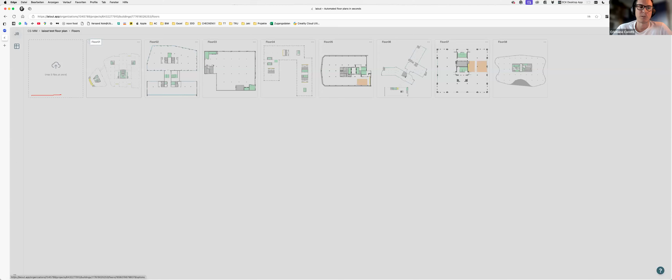Those are floor plans from different parts of the world, added on top if you want to test different scenarios, different shapes of buildings, different sizes. Those are here for you to test - they're all included. It's easier to learn and practice on different shapes, not just one. If you want to test different ones, it's all included.

Once you're here, for example, for the workshop we start with this one. This is a simple one, and it's always better because it's simpler to use. If you click on the 3 dots on the top right of each card, you see there are some settings - rename, favorites, setting.

If you click on setting, this is something you can do on any floor. If you have an occupancy you know is a maximum on a certain floor, you can put 150, 120, for example - the maximum value you want the algorithm to place, not the request from your client. But if you know that floor cannot stand more than 120 people for fire emergency or so on, you can type it. The algorithm will never place more than that - it's the ceiling for the algorithm. If you click submit, it will set this as your maximum occupancy.

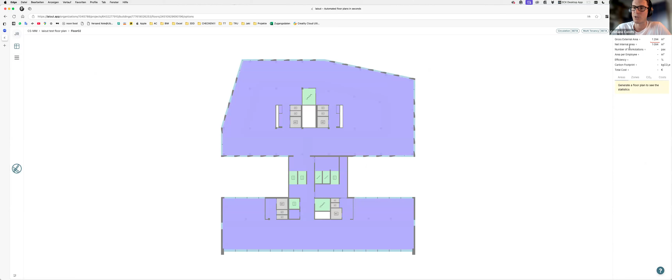So you will start to see the floor plan. On the top right, you get the gross external area - if you hover your mouse on that text, it shows the gross external area, the footprint of the building or the net area. You can visualize quickly how the areas are, and where you can physically walk. Right now, we didn't generate anything, so all these values are empty - it's an empty floor, no number of people, no efficiency, and so on.

If you go on the left side, there's the burger - what the tech people call burger are the 3 lines. If you click on the 3 lines on the left side, this will open the preferences. Those are the requirements the client will send to you - a brief, a program, different names in different languages, but you see here maximum occupancy is 120, which is what you set before.

At the beginning of the test, this number is the one that you put. So this company requested, for example, 120 people. You can type a value there.

Can I ask a question? Of course, any point in time. Sorry everyone, I forgot to say - if you have questions, feel free to ask. The gray area, the designated circulation space shown on the plan - is that something we have to put in, or something the program puts in?

Yes, that's a very good question, and the idea was to go there later, but I can do it right now. So in reality, this one is fundamental for the algorithm.

So you need to have a baseline, because the algorithm doesn't know otherwise where to enter rooms, for example. It has to have some, let's say, the spine of the building. And of course, you can change it.

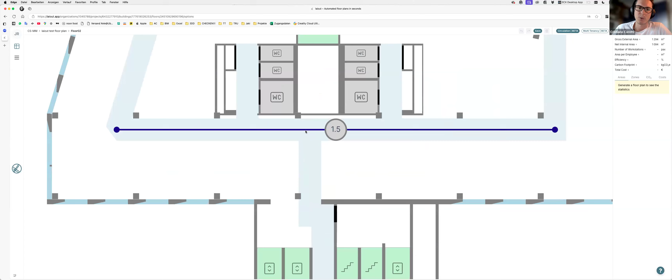But for example, if you click here on circulation, you see that now this one is activated. So you can physically, if you zoom in, you can see the circle.

So if you click inside the circle and you drag, you can change the dimension, the diameter of the corridor. So you have some corridors are 1.2 meters, some corridors are like 1.5. If you want, you can make a very big corridor and so on. As you see, the circle is the one that allows you to change the dimension.

But then you can drag and drop, drag and drop. You can drag it and move it. You can, of course, create new ones.

So for example, if you click on the white space, wherever the space is white, and click and hold, you can draw a new one. And you have this perpendicular, so you see the projections of the line. That helps you to understand where you can draw the line. What are the perpendiculars? Yes, exactly.

You're doing great. So you can change all the time. My suggestion is this one: you can have a starting point that is something you upload, but then of course you can change the corridor and test different scenarios.

Does it make sense? Double click to delete. One additional question: if I want to position the corridor, say 0.5 meters from the facade?

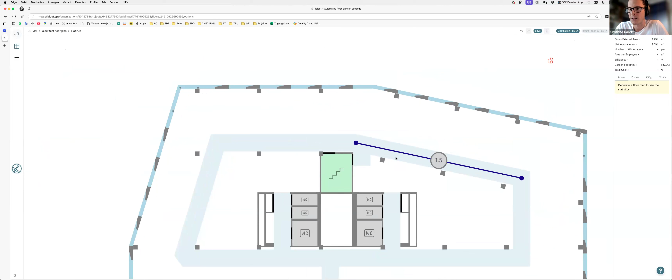It's a good question. Right now, this is something that usually you upload. So if you upload the corridor in the file, that stays there. Usually we upload a file for customers where the position is always like 5-6 meters, so you need to also include the space. But usually, if you upload a file with that, it will be placed in the position where you leave it.

And then, of course, you can change it. I upload the file with the information of the core, of the facade, and probably a defined position of the corridor, right? And that's it, the rest is empty, because then we have the details to handle, okay.

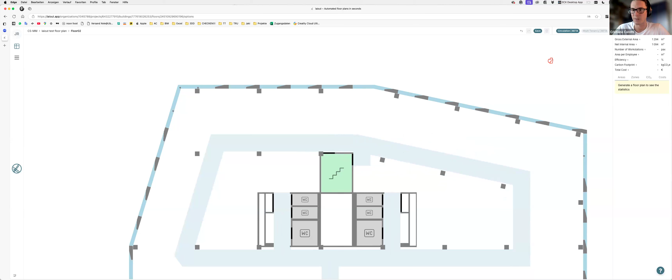Thank you. Exactly, no problem, Tiziana. It's a pleasure. Please ask questions, I'm here for this reason.

One additional question, please. Actually, the starting point of each project will obviously be to import the file and to define those different areas — where is the core, where is the facade. Is that something you're going to show us as well? Because it would be very helpful to start with importing the plan and then continue with doing the fit out.

Yeah, so what I can share with you, after this call, I will send you both this recording, but also I can send you a link to the guidelines. The guidelines will show you existing before and after files. We use 6 or 8 layers in total, and those are pretty much the basic lines to help the upload. So we have customers that use the layout and just use this system for uploading the files.

But we also help companies — for example, some companies we upload the files for, we do the QA of the files for you. We just receive, for example, some areas — we want the corridors to be in a certain position, we want some walls to be preserved. So that is an example of how we usually work. I will share with you later this link so you can all see what the guidelines are.

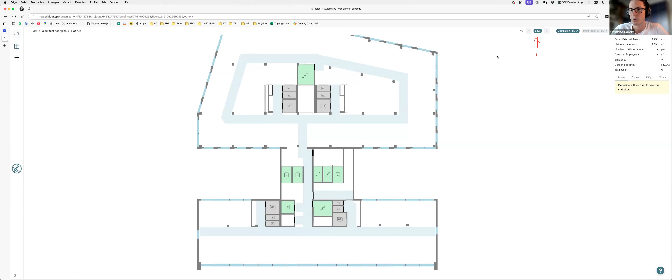And Jacqueline, if this is the corridor that you want, you can decide to save it, or you can just generate this one. If you save, it will be stored, so you will see it later on the app.

Now if you click on preferences, you can type the number of people - how many people do you have on your floor, or what is the request from your customer? Of course, if the customer asks for 150 people and the floor can have a maximum of 120, it will show an error. That's why you need to know a bit about the building beforehand.

Then by default, they will all go in open spaces. But if you click on closed offices, this tab will open a submenu. Quick question - it says number of workstations because you just said how many people. That might be a different thing.

Yes, normally you can have a lot more because, for example, if you consider meeting rooms, you could have 500 meeting rooms and people could sit there eventually. So the base is workstations, but I can show you that you can edit things. Usually we work with metrics based on workstations, but the number of people you can also check with one click - you can see how many seats you have in total on the entire floor.

So once you're here, if you hover your mouse over plus, you can see that you can create small, medium, large, extra large offices. The last one, a star, is for custom - if you want a specific number with a specific ratio that isn't allowed by default. Small is for 1 to 2 people, medium 3 to 4, large 5 to 10, etc.

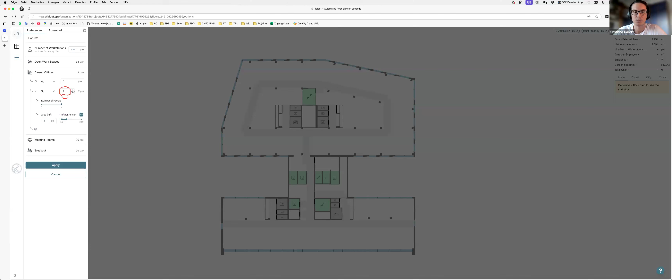Here you define how many people, how many rooms of that type you want - you can add or reduce. This isn't a big office, so of course it won't have a million people, but it's just to give you an idea.

Same thing, you can add more typologies on the plus. For example, a small office for 2 people, small office for 1 person, small office for 1 person bigger - you can create all the combinations you want. The AU option is for cases where customers want to quickly understand how many people they can fit, like needing 20 people in closed offices.

The algorithm will place 20 people with different combinations, but it's more automated - it's not following the same strict criteria as when you add manually on the plus. So you have different ways to approach this. AU is more generic, so if you want to be generic, automated is the way to go. If you go specific, that's a different type of approach, but you can choose the same process.

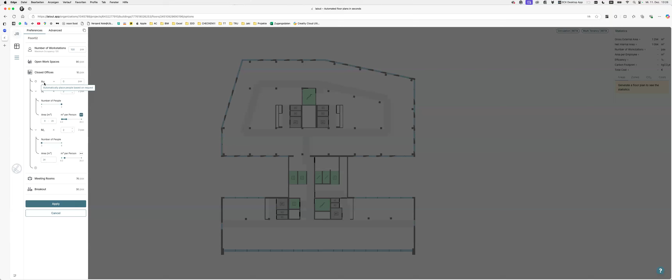Can we just import it and work with it? At the moment, we don't have the import function, but what I want to say is you can create here and replicate what you get, for example, on an Excel file.

With this button, for example, you're testing 2 buildings, you can copy. On the top right, you have the copy button. You can copy the settings, so you do them once and test, for example, 3 buildings. That's another case - you can replicate the same settings you put once into multiple buildings.

We have some clients testing 3 buildings for the same company, and it's always the same request. So instead of doing it 3 times, you do it once, then copy it into 3 different floors and test on 3 different floors.

Okay, thank you. So next year we are going to work on this upload, but it's something we have to postpone. We had quite a few things to deploy by the end of the year, so we're a bit squeezed, but we're getting quite a lot of things that are quite cool.

Then if you click on meeting rooms, it will open up here. You see there are other typologies. It's the same process that you do for closed offices - it works for meeting rooms and for breakout spaces.

If you want to remove something, like if extra large isn't necessary for the space, you hover on extra large and it will show a minus sign. You click there and it removes it. So you can very quickly add or remove.

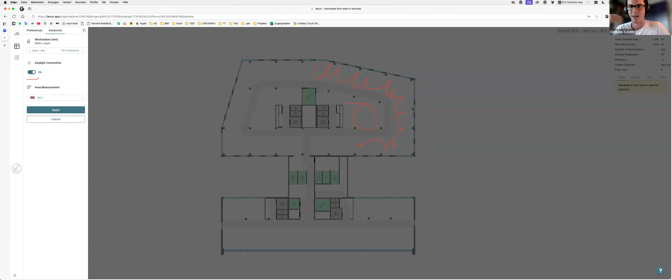Then you see daylight constraints are on. So you know that workstations and work areas will only be placed on the area close to windows - after 5 meters, roughly 5 to 6 meters is the range, they will not be placed in that area unless you switch it off. For example, when we work in the UK, since the UK doesn't have those rules, you can switch it off and it goes all the way across the building.

This is also a safety setting - even if you make a mistake later and select an area you want to change, it will show as white, as empty, to remind you that you cannot place workstations there if daylight constraints are on.

Then area measurements is for the areas that you see here. This building is in the UK, so if you switch to GIF it will measure the areas in a different way. Just one question.

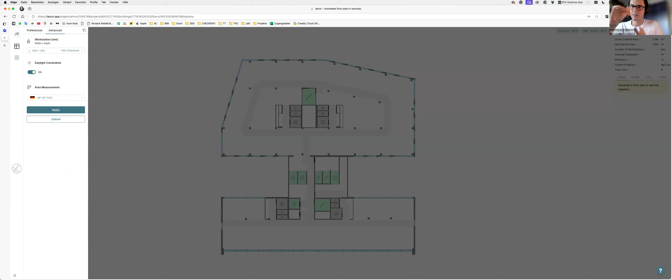The workstations are going to be placed close to the windows. A meeting room can be outside or in the middle, both are fine. There's a difference between has to be and can be - a meeting room can be next to a window but doesn't have to be, since it can also be where there's no light. But when you switch on the light constraint, you have to have work areas, closed and open space, next to windows. So one thing is that you can, and then you have to - that's where the difference is.

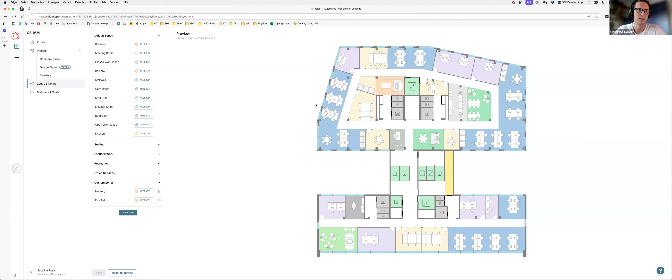I take notes of these things. If you click on the X, and then just click on the layout logo here - this one is, I think, 2 seconds or something - you get the first options. And if you click again, every time you click, you get another set of 3.

The idea of the initial step is to give you different combinations. You can click as many times as you want, and every time you click, you get another set of 3. The reason we don't create 500 options at a time is because having to look through 500 options takes a lot of time.

The idea is this: if you take your mouse, hover without clicking, and start to move on the right side, all the data here is updated. You see that all the numbers are changing, because we allow the algorithm to be flexible and start to move things around. If you move one room from one space to another, you can quickly change the space. You can see the number of workstations, the area per employee, the efficiency of the floor, the carbon footprint, and the cost - this cost and information are all based on the data in each floor.

These icons, the little icons in the corners, guide you through the options. The green ones are lowest cost, lowest carbon footprint. The blue one is the highest, the most spacious one - this one has more space, this one is more dense. Those are not the final step - they're just the intermediate step where you can start from one value compared to another, depending on the targets that you have.

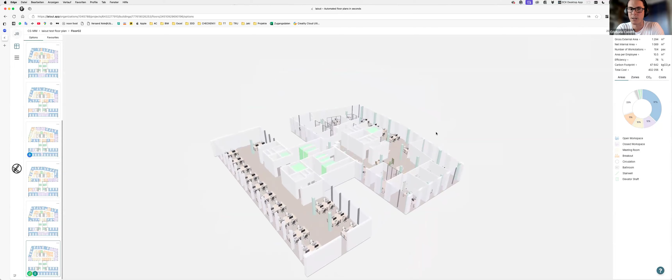So with one click you can create a 3D view from something that didn't exist a few seconds ago. You can spin around, and if you go closer and move your mouse - where is the corridor? You can double click. Exactly, you did very well - you can see you can move around, use the arrows and move around the office.

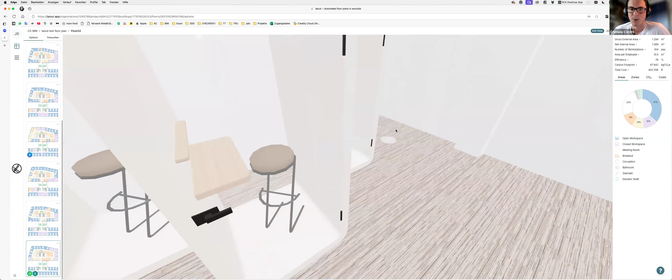This one is like a preview - in a sense, it's not your final design. Maybe you don't like this kind of carpet or these chairs, but it's mostly to get the volumetry, the volumes of the space. You see where your cursor is, and it works exactly like Google Maps - even when you're inside, you can double click on a corridor and it will take you there. Yes, if you double click there, you can move around and see the corridors and spaces.

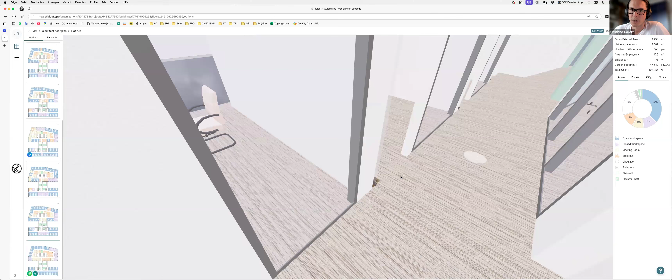So then if you click back on 2D, you go back to the 2D view, and here is where you can start to edit things. For example, if you zoom, that will bring you back to the set, to all the options. You can see all the options here on this side, so you can very quickly see it.

Let's say this area in the bottom is the one I like the least, and you want to change something. If you zoom in on the bottom part, let's say you want to change this area and organize it. If you click on the zone, you will see these settings. If you click on the info button, now you select the two areas. Just click wherever is white to deselect, and now you can select.

Then the info button here will tell you information about the total number of seats, so it calculates the seats everywhere. You can even select the entire floor and see how many seats in total you have, not only the workstations, but the areas and the ratios.

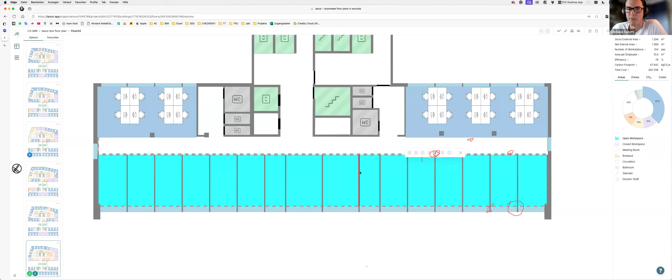This button here, the fourth one, lets you split. Whenever you want to split a space, it will recognize the elements of the building - in this case it will recognize the frames of the windows. So if you click there, or wherever you prefer, it will split the space.

Now you can, for example, click outside, then click back on this one, and then split - please split here, for example. You can click outside, click on this one, and then this button here allows you to change it.

You can change it to anything else you want - so open workspace, you want to change it to, for example, breakout - and it will replace the area with something else. If you change it to meeting room, remember before I was telling you about the quantities of cost, CO2, and so on - if you change it to meeting room, it will just allocate people there.

Then if you click outside and zoom in, if you click on the furniture now, you will see that you have these new buttons here. This one deletes, this one on the right copies, and the one in the center, if you click and drag, it will increase or decrease the amount of desks.

If you drag it up, hold and drag, it will add. If you go down in the same direction, it will remove. Again, the idea is not that you will need absolutely to use this table - you can use any other shape, but this one is to quantify the space, so how many you can place.

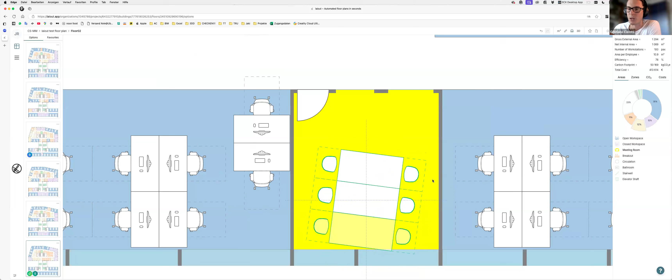And of course you can rotate it. It recognizes obstacles - for example, if you go against the wall, it will recognize that there is a wall. You can click and hold to move things around, and if you release, it will recognize that there is a table in the middle of a wall and it will remove it.

This works for everything, and every time you want, you can undo. On the top button you have undo, or you can just redo what you were doing before - you can change or refresh the space, and make it in any other topology if you want.

Custom is whenever you have a space that is not on this list. So if there is a client who wants a server room, we don't design server rooms - laiout wasn't born for that. But you can type anything you want, choose an icon, and the area will be replaced with that icon. This means that if you have a server, you can just choose an icon.

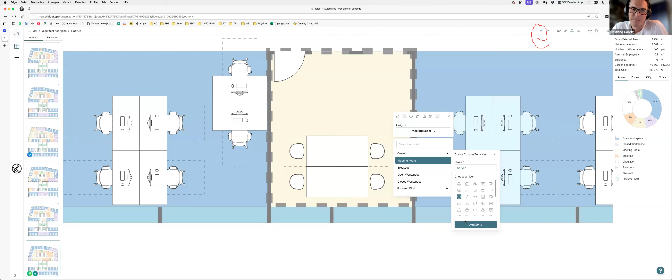Anything that you like, really. So the area will be replaced, and if you go here, you see that there is now a server room over here.

So every change that you make in the app has a direct impact on the full design. This is quite important to notice, because every time you do a change - for example, you see now you have 100 people in total.

If you click on this desk and click and drag it outside, drop it outside - now 98, the area per employee changed, all the statistics and numbers change. So every time you do a change, it will have a live impact - you can live change and correct what you're doing.

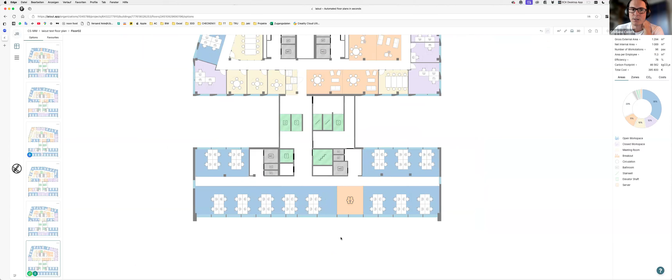And of course you can change everything - you can add the kitchen, for example, you can add other topologies of elements. You can merge, for example, let's say you want to change this one to a reception. You can click, click outside, change it, and you can do like office services.

And then you have like a reception. Question: if I add a meeting room, for example, down at the working place where it is, will it remove the meeting room somewhere else?

No, because otherwise think about it, you move it, you add it in a place and then it will remove it from the other. What if you wanted to keep it up there?

So in reality, you can see here, if you go in zones, you see the breakdown. So you can quantify and check, for example, the quantity of meeting space that you have.

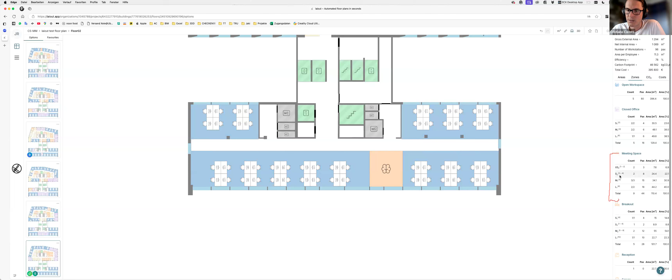Okay, come back. It actually overrules what you put in at the beginning, if you start working. Yeah, I mean, if you think about it, it's like design, right? Usually when you need to do it, that was the question. Just to make sure, no, of course, I'm trying to help.

So, of course, it doesn't always keep what you want, but even in that case, let's say you can select, for example, if you select this area, you can do just a rectangular selection.

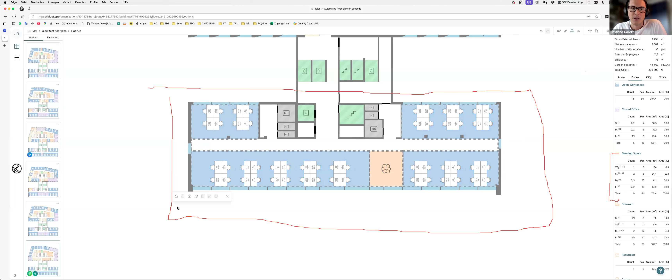Yeah, if you select everything, you can use this button here, the lock. This will lock the selection. So let's say this part is your favorite part of the office, and you want to keep it while you change everything else.

You just click on regenerate, the generate button on the left, and this will give you other combinations. Keep modification, you can say yes or no.

It doesn't matter, because it will just create 3 new options where the part you froze stays the same. Of course, in a small office, if you freeze everything apart from one room, there will not be a lot of options generated, but it depends on the different combinations.

And of course, you can use both this generation in which you freeze parts, and doing it manually. Does it help so far?

Yeah, thanks. Okay, one more question. We often have projects which are bigger than 1 floor, so we have to prove a building. Now we're talking about 1 floor. How does it work with more floors? You were talking about 900 people you were checking last days, you said. How does it work? Was that 1 floor only?

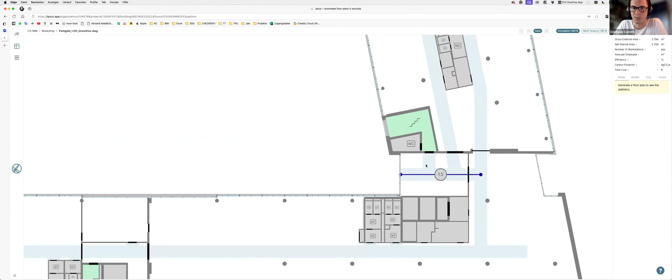If you make a mistake, the undo button is always there to help. So the way it works is the same. I didn't set the maximum occupancy in this case, but you can go back and set it at the beginning. You can adjust, even go back one step, and in the settings you can set what the maximum is. Of course, we don't think there are 10,000 people in that space, but usually we put a big number so it's evident there is no limit.

So what do you recommend, should we always use a big number, or is it best to set a specific one? Honestly, it depends. We put a big number as default just because we don't know if people want to do max capacity, flooding the space with people and then removing, or if they want a small amount to be sure. It depends on the company.

If you go towards Asia, it's more about max capacity, how many people you can fit, regardless of how many people can actually live in the space. Europe, apart from the UK, is a bit different, and it's about smaller numbers. But I have no idea, Milos, how many people were in the project?

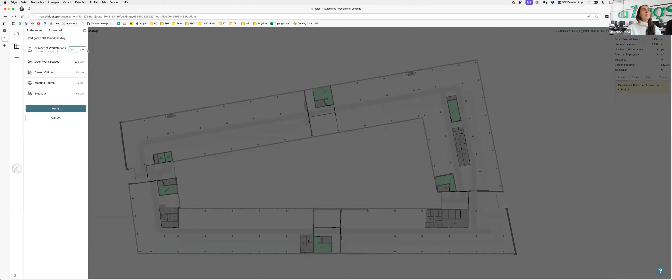But if I put 250, then it's not going to go up, or is this a limit? Is it the limit? The occupancy is, for example, for a fire emergency—you cannot place more than a certain amount of people due to how many can actually escape the building. So it depends, those are building regulations usually, and it depends on the building most of the time.

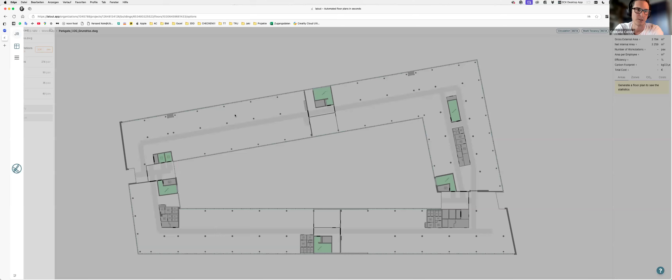So we don't know what the regulations are for each single building in the world. That's why this isn't even about country regulation, it's about the building itself. If a building is made of wood compared to concrete or steel, it has different ratios it can hold, so you can change it—you have the settings to control it yourself.

One question: did you mark the stairs and these areas, or when? Yes. So in reality, when we uploaded the floor, we see the CAD file, and staircases are quite easy to recognize, so we mark them as a stairwell, and that's why you see them marked in this way.

Whenever we select an area, we mark it, we don't put every single step because at this level you don't need to know how many steps there are on the stair, just the area. One thing we're working on is telling you how far you are from emergency exits. In case of fire, different countries have different regulations—with a sprinkler system, you might have 40 or 50 meters, depending on where you are in the world. So it measures automatically from a staircase, meaning you know from the door of the stairwell you need to be within that distance, and it will color accordingly.

We are actually experimenting with this now, so it's quite fun to see, but it's still something that will come live next year. And this import, are we going to do this now, or are you going to send us? Is it something complicated?

I'm sending it. It depends, like I do it every day, so for me it's not very difficult. Some companies do it daily, some others simply want our help. It's not really a big deal for us.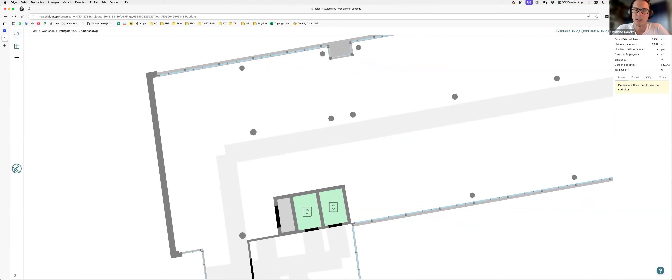And for example, even if you zoom out for one second, Kajetan, please, this area could be very wide or very small. So this is a kind of courtyard, but sometimes you have light wells that are very narrow, and the algorithm doesn't know if that one has light or not. So we have a layer called the light well, meaning light enters in that court.

So we have buildings with big courts with a skylight. In that case, you can place work areas that face inside the court, and then there's a layer called the light well that simply says there is light inside. Otherwise, the algorithm recognizes only the outside of the building as bringing light in. This is very technical, but it's pretty much how the algorithm works in the background.

Makes sense. But what I sent you was a DWG. Yes, we work with that, the only thing is instead of DWG, we import DXF. You pretty much just save it from DWG. It's because Autodesk is not very friendly with startups, so you need to use open source formats. Okay, so when I have a DWG, can I set my DWG already with the parameters?

So when I import, is it going to recognize what's a window, walls and whatever, or do we put the file there and then have to really define what's going on, or no? Of course, if the file is saved in the DXF format and it follows the guidelines, you upload the file, it takes 3-4 seconds and it's online.

Can I have one quick question, Cristiano? Of course, please. Is there a possibility, because I think the question was how to do the grid ourselves, so it's generated within grid. Can we cheat it a little bit? Do I understand correctly that if we are making the material of the facade or layer of the facade in the DXF file, the glass one means it will not connect the wall, and the wall one means that it connects, or it's a mullion? So actually we can make the mullions that we do not want to connect to the walls like the glass ones, and make it only grid with the wall material on the facade, and that way we have a possibility of controlling our grid. Is it possible to make this?

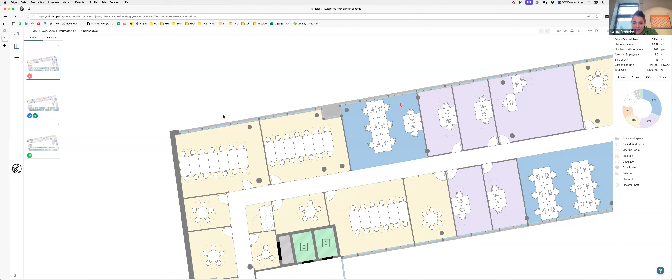Does it make sense? Does it answer your question, Tiziana? What do you think? Yes, but for example, Cristiano, if you take a look at this generated floor plan, if you zoom in please Kajetan, in this violet two double rooms on the right side, there is a wall positioned. I'm sure this point is not possible because we have the two big pillars, and then in the middle we have one, and this is the Pfosten, which comes after 1.25 or 1.23 meters, and the one where the wall touches the facade.

I think this is only a kind of Öffnungsflügel. I'm sorry, Cristiano, it's a window. It's a window. Oh yes, window, it's a window. Oh God. Öffnungsflügel. Oh my God, it's a fucking window. No, but this is how I talk at home. Don't worry. No, but when you're here, like, Achtung, Ada, eine Absturzsicherung. Sorry, okay.

It will recognize those alignments. So in reality, in this case, we had the mullions looking like structural elements. Can I delete a wall?

You can actually, if you click outside and select these two, you can merge them together. So you don't delete, but you merge it, because it's like you simply assign it to another room. So if you click on two, you have this. You click also on the other one on the right.

Now you need to select these two. There's a merge button here. That's also good. It's like in science, you can transform something, but you cannot destroy it. There is always this wall, you can assign it to one space or another one. And of course, you can just organize it in a different way.

I understood better what you meant. Yes, you can. It's mostly about, in this case, the building had a lot of these small elements, and we simply mark them as a grid. It could also be used as a grid in some cases, but we don't know every building. So it is not a difficult thing to change.

My furniture is glued to the other ones here. How do I separate? Because you selected two, you just need to select one.

Of course, you can if you click. User error. So if you click twice, you go from the group to the single workstation. And for example, if you click here on this one, you can rotate it, drag it down.

Click, drag, click and hold. Don't worry, it's the first time it happens. If you click and hold that line and drag it down. Which line? There's a circle. Click there, that icon, yes. Click and hold and drag it down. Yes, it will mirror.

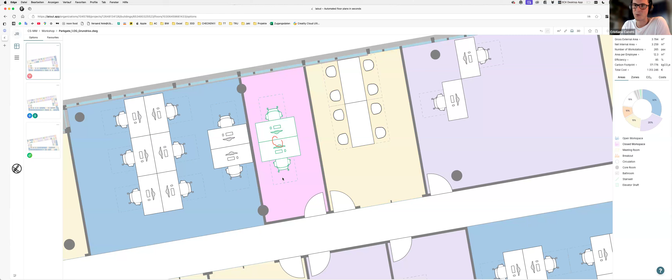Every time it's the first time, it's normal to have this, but you can adjust the spaces very quickly. In this case, for example, recognize there is an obstacle here. You can split this one into two, and it will refresh.

Can I move elements with numeric input? For example, 1 meter from the wall or 2 meters from the wall? No, that is not possible. It's a good question, we could add it in the future, but it's more like a feature for... actually, it's the first time I've been asked this. But yeah, it is something we could work on.

Usually the difficult part is that I think it's more related to BIM that you get this kind of question, because when you move these objects, you always need to define the direction where you're moving it, and it's a bit complicated to do. Yes, but maybe this is the limit of the program, which is absolutely fine, because there should be a limit.

Otherwise, you don't need architects anymore, so we have to work. Yeah, this is what I said before. After making the fit out with this one, we have to do the proof, then we have to work in detail.

We have a customer in the US actually. That's quite funny, they do a lot of ping pong tables in their offices. They have them spread around a lot. So it's actually the type of office where I would like to work.

You can change topologies. For example, there is a T-point, and if you have a kitchen, there is an area where you can put a kitchen. Let's say you can put a kitchen here. You can change it, yeah, you can do it there.

If you go to Office Services, here, you mean? Yeah, it's whatever you prefer. You can just change, and you go to Office Services, and then you have T-point, and this one will give you like a kitchen. Of course, you can place it against the wall, because it depends. You can have also a standing kitchen, but you can pretty much organize it and place it. Usually, where you have a core space, you can place it, and you can rotate it.

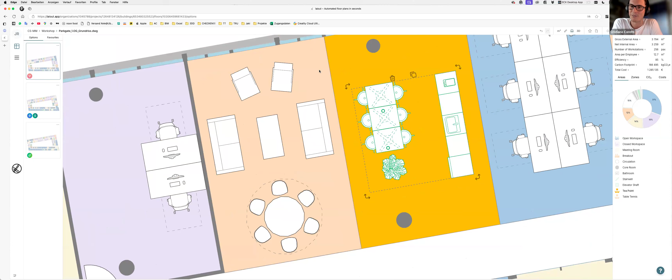Actually, you're quite lucky, because next week we're going to add quite a few things. One of them is you can select a single object, so you can select chairs, or a plant, and move it. We deploy this feature next Monday or Tuesday. For a lot of people, it's quite fun, so they can create entire new sets of topologies. Very cool, I like it.

And of course, you can save here. This is important, so whenever you create options, you can click on the star and add it to your favorites. You can call it whatever you want.

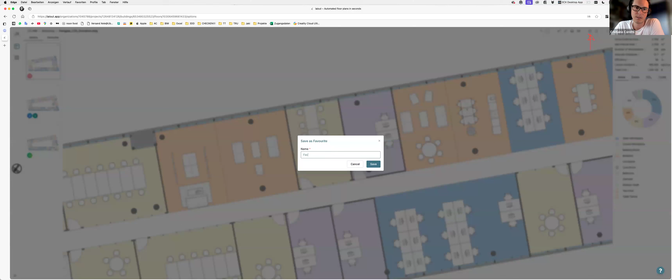And this will be renamed. Of course, your file will have a name, so it will be stored. This file is a bit bigger, but it will be here. And then if you go into favorites, on the top, you will see the option that you saved.

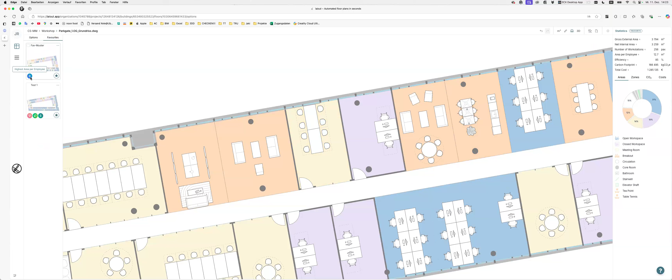I have another question concerning the kitchens. Is it possible to let the program know where to place kitchens according to where I can have water? Because yeah, it looks quite nice, a kitchen in the middle of the room, but it's not that realistic. So no, of course the idea is you know yourself where you can, because the algorithm doesn't know where the pipes for water are.

So in reality, it's important to give you control. You are the one using the app, so you know where you can place it. But based on that, you need to know, of course, where there is water. It's beautiful, the kitchen, wherever you want, but of course, I know myself. It's usually more to prevent issues. We give you the option to use it, but we don't always know where this can happen.

I have one more question. I tried saving with the star as a favorite, but when you go out again, it's deleted. How is it actually possible to save one of those test fits, so you can find it again later?

I think this one was yours, test one. Yes, okay, sorry, it's always saved. I panicked for a second. What do you mean it got deleted? Sorry, I got worried for a second.

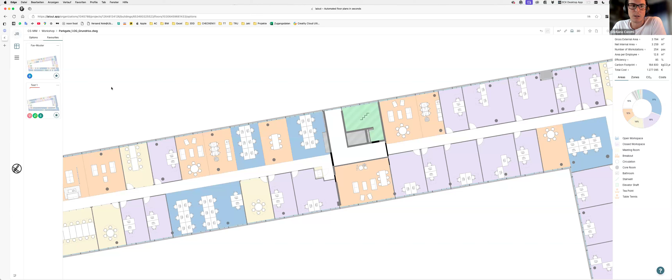Let's start over. Jacqueline, can you click on workshop? Can I save the changes I made in a favorite? Yes, if you click on save, since you saved before but made changes, you can override, or do save as, like any file in Word or anything else. So you can save and it will replace the one you did before, or you create a new option like test fit one, test fit one version two, or for example more meeting rooms or less meeting rooms, whatever you want.

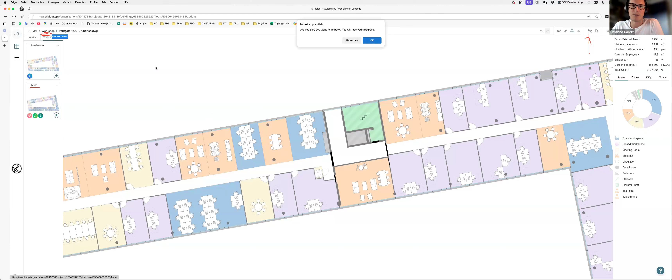If you click on workshop, we start from the empty floor. In case you want to review your favorites, you can go into the three dots and see favorites, so you don't need to enter inside the floor. You can just click there and visualize all the options your team saved. So everyone in your team can work on all the options. Think about three people in your company working on one floor plan - all of you can save the options and review each other's work.

Okay, so can I work like she's working on this one? Can I work in parallel? You can, but not at the same time, so you will not see each other's mouse in that sense. But for example you can open this file, make changes, and then save as.

So in reality, the option will be opened and you can edit it. For example, let's say someone did one design, then someone else joins and says, I think Jacqueline did a great design, I just don't like this part - or maybe you are not in the office and someone else has to make changes. They can do it on the spot, make changes, and save it as a variant, for example Cristiano's variant. So you can literally change quite a bit of the design.

Now, once you're here, if you click here, those are the export formats. If you click there, you can export the CSV. CSV is the Excel - everything you see on the statistics, every single page: the areas, zones, the carbon footprint calculation, the cost. If you click on export CSV, you'll be prompted with what you want to export - the percentages, the areas - all of it as an Excel file. It's simple, you can choose what you want to keep, save, or adjust. It's just a very basic CSV.

You can just open it and visualize it simply. I never actually tried it on Mac, but yes, it's a CSV file, so it opens normally on anything. There's a table, a spreadsheet with the breakdown of every single area, so you have data based on the design you made. You can track the areas, the percentages of occupancy of that floor. So you can have floor plan number one, download the CSV, and you have the floor plan with all the data connected to it - you can keep it as a data comparison.

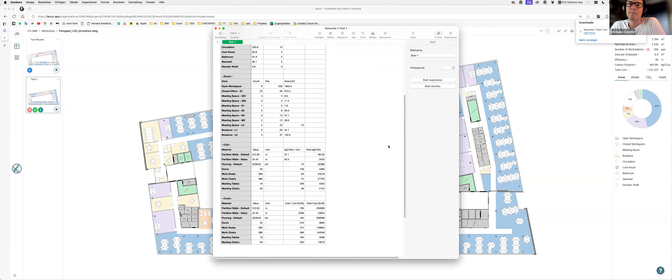Then if you click on the same export button as before, you can download the CAD file. The DXF is the CAD file, which will show all the blocks, everything you see here - you'll be able to open it as a CAD file. Every block is an instance, meaning if you want to replace a table or a chair, changing one will change the tables and chairs everywhere in the furniture, in the floor plan. So if you have a different type of chair you want to use, it's one click, one change, and it replaces everything. And yeah, this is another one.

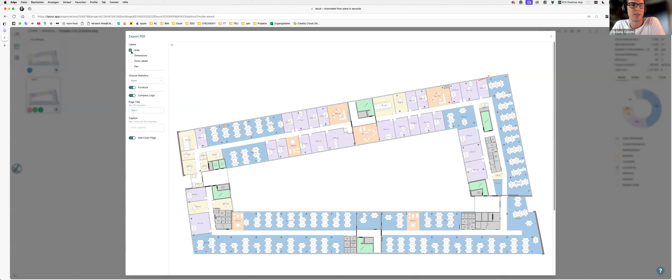And the last one is the PDF. You can create PDF presentations. Someone removed the company logo, but you can bring it back. If you have a company logo, it will appear here. If you upload a company logo in your profile, as I showed you before, it will show, but I think it has been removed and I cannot see it now. Anyway, we can test it, it appears there usually.

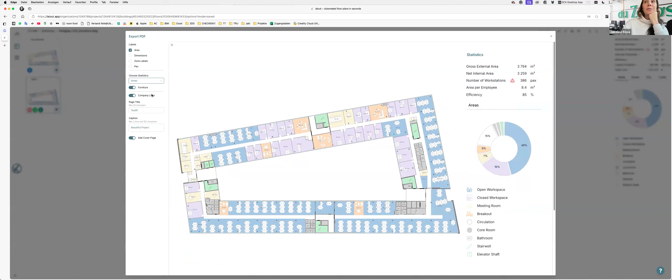If you want, you can click here on show statistics. There you can choose, for example, areas. You want to show the area breakdown, the percentages. If you scroll and move your mouse down, it's here.

Sorry, your screen has a different ratio, so it's a bit bigger, I think. Ah, okay, so image - sorry, I couldn't tell on the screen. Here, for example, you can drag and drop an image. Let's say you want to have the outside of the building, you can drag and drop an image, and this will be your presentation. It will have your logo here. You can type different things, for example a project name - that's why I called the project name workshop, but of course you can rename it to anything else.

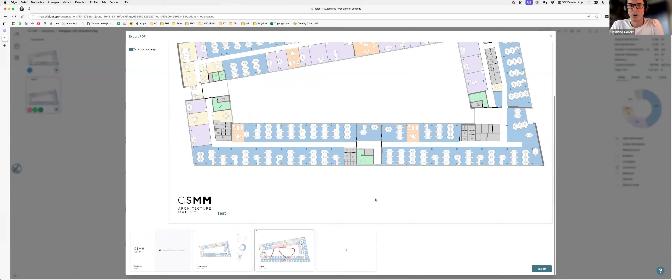And then, for example, you can add a page. If you click there and go up, you can change the text. Let's say here you want to hide the furniture but show the architectural dimensions, so you can click on dimensions.

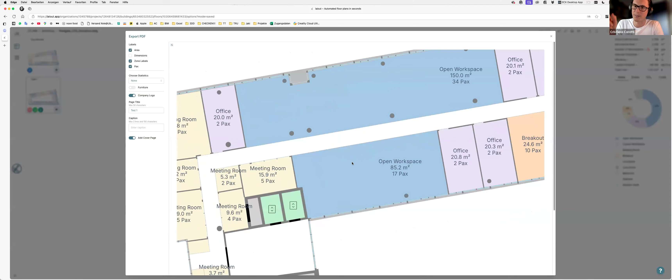Or you want to add another page - if you go down, you can add another page. For example, you want to remove furniture but add area, zone labels, and number of people. So if you zoom in, you will see that every area will have a certain amount of people, let's say a meeting room. You can also resize the dimensions, so you can actually see a breakdown of spaces.

If you want to reset the view, you have the button on the top left. You can choose if you want to visualize it that way, or refresh, and it will go back to fit. And of course, you can download this file and export it and everything else.

And if you click here, there's also another thing that is quite cool. Once you save the file, you can create a shareable link. So instead of doing a PDF, you can actually do something more interactive that in most cases is more useful. You see these three dots.

Here you can do the same things, but you can also share. If you click on share, it will allow you to share the option - yes, this one, since you made some changes, so you can save the new option. And here you can decide for how long this link will work. So you can set this project as designed for the next month, but then the link will expire. You can choose any date.

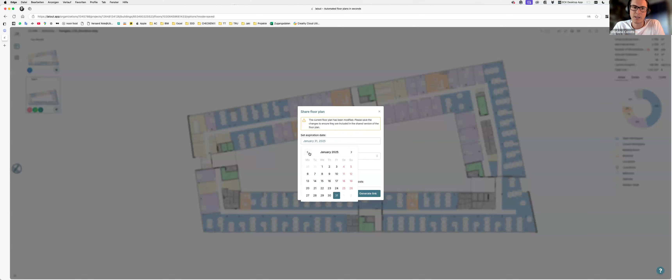The expiration date is also linked to our license, right? Probably not - it's up to you how long you want to have it for. Of course, I wouldn't suggest having a link for like 10 years because it doesn't really matter that much, it's not tied to your license. You can keep it also for later. This workshop we are doing together is to give you a chance to test the app and see if it helps, but I'm not going to check if you're using this one for whatever time after.

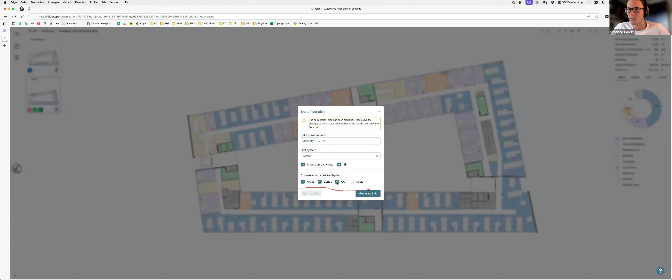So here you can choose what you want to share. Let's say you want to hide the cost and CO2 because maybe you don't want to make your client panic before it's too late. So you can choose whether to show these things or not, and then once you are ready, you generate a link.

Can you open a new tab? Okay, I don't know - yeah. And just paste the link.

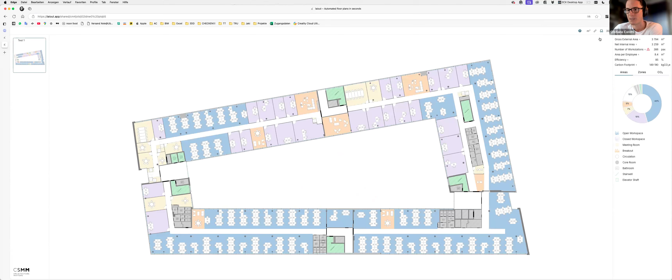So this is something you can send to anyone in the world. They will be able to open the link wherever they are, from a phone, from a tablet, literally everywhere. And they can do all the things you do apart from editing - they will not be able to edit, for example, change a room, because you're the designer and you don't want them to change things. But they will be able to spin around, test, change, jump inside the floor plan and visualize things.

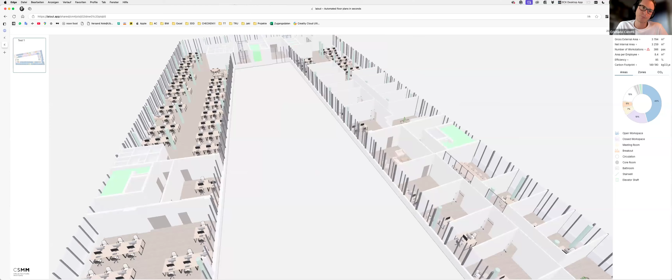Can I set the material? Not in this case. So there is a function that I can show you on my side of the computer, because I have superpowers. As a super user, I have some functions that other people don't have.

So for some customers, we have AI renders included. AI renders is something where you can type what you want. So you jump into the 3D, you can type something that you want, and you get AI renders based on that.

And can I have a white model instead? Oh, it's a good question. We recently got quite a few people asking. It is something that we will do, just it has to be in the first quarter of next year. It's mostly for schematics and graphics. So yes, it is something we will add. We didn't have time to add it by end of this year, but it is something that will come.

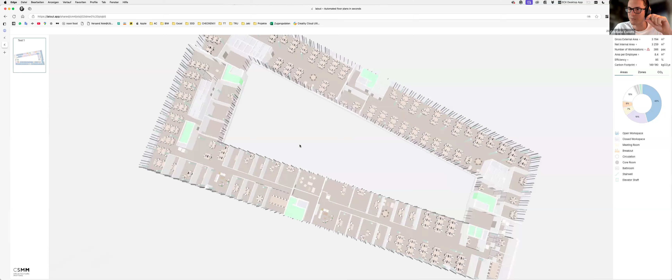And I can show you something. Remember before we were talking about the settings for the parameters for the algorithm, how many maximum occupancy. You set a value, but then you made some changes in the app, and these changes of course impacted the occupancy. So this one is above the 300 amount of people that you set.

Cool, that's also good for analysis. Yeah, so this one is telling you, so the algorithm itself will never do this. The algorithm is not allowed to place more than, in this case, 300 - you see here, there's a 300. But if you manually select everything and say make it into workstations, it's not going to tell you no you cannot do it. It will just show you that there is a mistake. But then it's up to you, you're the designer and you are the one in control of that.

So Cristiano, cannot - for example, sorry, I have one question. For example, if we have different rental units per floor, can we define that in parameters, or do we need to import different fragments of the floor plan and give the parameters separately?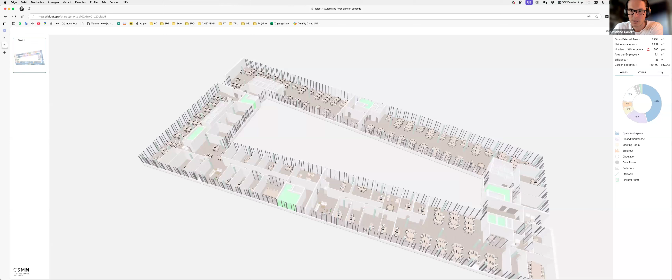So if you have different units and you want to work just on one unit, did I understand correctly? Yes, like for example, if we have on one floor 4 rental units. Okay, can you go back? I will show you now. Can you go back to the first tab? Yes, okay, this one is the one where you want to create something.

Okay, yes, start, you can go here, workshop, because now we are inside the favorites. I was going to go to this description now. So in reality, perfect timing for the question.

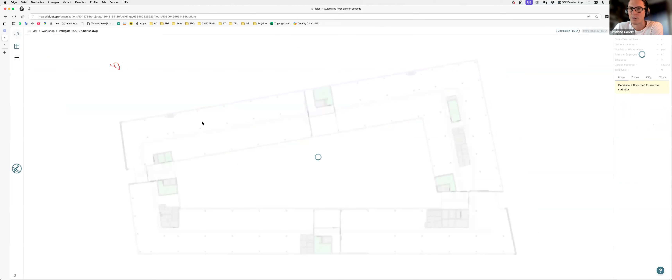So if you open one floor, do you remember on the top you have the settings for circulation, but there is also this one - multi-tenancy. If you click there, it will allow you to create the rentals or the different sub units that you want to work with. So let's say, just giving an example here, if you click on it, you need to activate it first. So if you click on that one, okay, now if you click once here.

Here, and you pretty much follow the perimeter of this area. You don't need to be inside, you can be even outside, you see? And you go up and then you close again. This one will be the unit called unit 1. You can save it, so if you save it you have a one tenant rental unit, depends how you want to call it.

In this case, now this one is selected. If you set the preferences or click on generate, it will generate a floor plan for that space, only for the selected one. So now you see the black lines around it, it means it's selected. If you click on generate here on the left side, it will generate only for that rental unit or tenant, for example. We didn't bother now to put the settings, but it will just show you that specific tenant. And of course, if you go into 3D, the 3D will only have that area, the rest will be empty.

So it will allow you to do the focus on that one. Does it answer your question? And can we have all 4 tenants, for example, at the same time in the same plan?

You showed us this possibility of freezing one part. Can we not work like this? Yes, freeze the parts? Absolutely, yeah, you can also do it in that way. So if you want to work on the full floor, you can also do it this way. The only difference is here you select only one part and you get the net area for that part, while if you have the full floor, it will show you the full area for everything.

It depends, we work with different use cases. In some cases they only do one tenant at a time. In some cases they do the full floor and then subdivide. But this is just to give you a bit of an option. It's difficult to make everyone happy. We try to do a lot of different options, but this in general can be a good starting point.

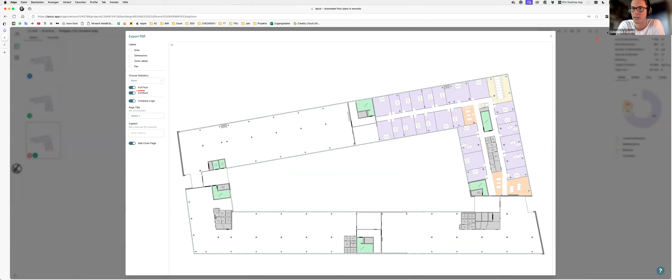Okay. Yeah, of course, your company logo is always on the bottom left, that's usually where you place it.

Okay, yeah, those are most I would say all the options at the moment, apart from AI renders. If you want I can show you the way it works. The AI render I can show you on my account if you want, if you're curious.

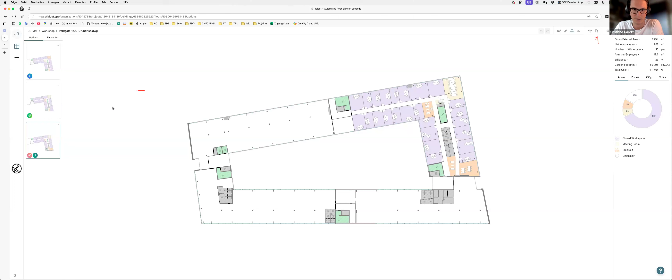Can I ask you just one question? Can we? Please, of course. Can we export this 3D as an IFC file?

Soon, yes, so it's going to be early next year. We are experimenting with it. In reality we already can export in IFC, it's just that we are testing, because we are getting feedback from customers that are using it, and they tell us, okay, can you group files in a certain way? So yes, and it will happen early next year, we are working on literally that at the moment. But then the idea is to use SketchUp for the basic 3D, and also possibly 3DM. But 3DM is a bit more complicated, I don't know if you use 3DM, but it's a different type of format.

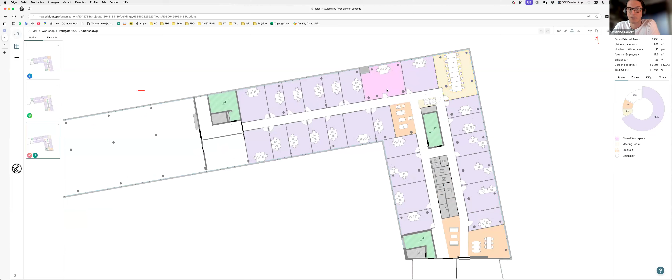I will just show, if you're curious, the AI renders. They're fairly cool to see, because it's also like an experiment we did a year ago, and we developed our own pretty much way to do it.

Can you see my screen? I think I'm still sharing. Do I have to? I don't know if you can see my screen. Yes, can you see my mouse? Okay, yes.

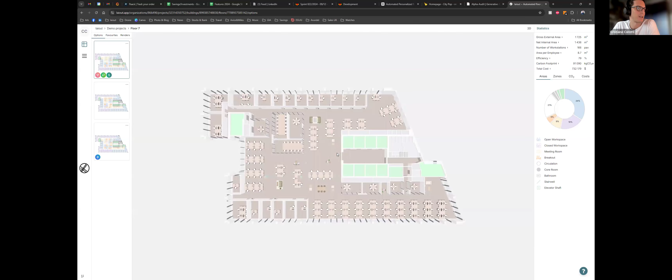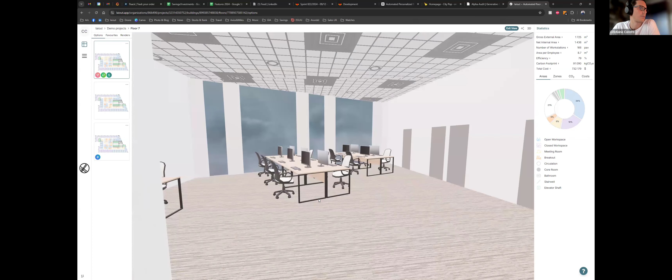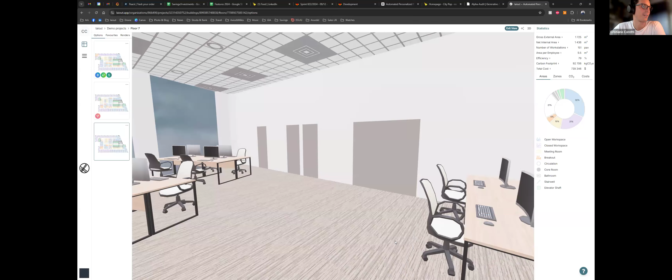But you can just type, for example, you want to have standard, let's say, wooden floor, and you just click on generate. This one pretty much creates different combinations of some options. Of course they are not very strict in terms of the output, but we are improving quite a bit. We're doing some experiments to, for example, change the ceiling if you want a more industrial type of ceiling, like one with pipes and so on. So we are doing some testing over there.

But we have some customers, for example, that use this instead of creating a Pinterest board to give a styling of a space. They can actually very quickly give a rough idea of how the space can look. So it is fairly fun usually.

I hope so far this explained quite a bit of how the app works, but yeah, it's important that it works for you as well.

While we wait, I just have one question. Kajetan mentioned that the furniture, they are designed there, they are from Vitra I guess, is it correct? Yes, the furniture at the moment is Vitra.

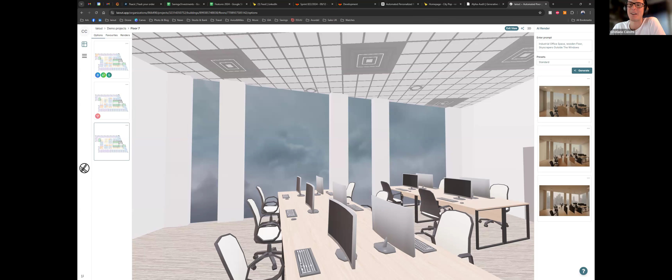We are, yes, all the furniture in the app are Vitra based, apart from a few that are Technion, just because some furniture by Technion are prettier than the ones from Vitra, but most of them are Vitra. It's a bit of a mix between Vitra and Technion, yes. But it is pretty much fairly mixed.

At the moment we are going to add more. We have some conversation with some furniture producers who want to display their own. Don't take it as the final output that you want everything to be Vitra, because that's also going to be the most expensive office. We were talking with Kajetan last time, it's gonna be the most expensive office in the world.

The idea is also that you can simply replace objects, because in reality we display a chair, and then you can choose that this chair can be any chair in the world, can be an IKEA chair, can be a Miller Knoll chair, can be any other company. The whole point is this: I want you to get to a certain level of confidence in the organization of the space, and then you can decide what you want to do with it.

I hope it makes sense. Were you showing the renderings? I didn't see... ah yes, sorry, I showed it before. I can show it again.

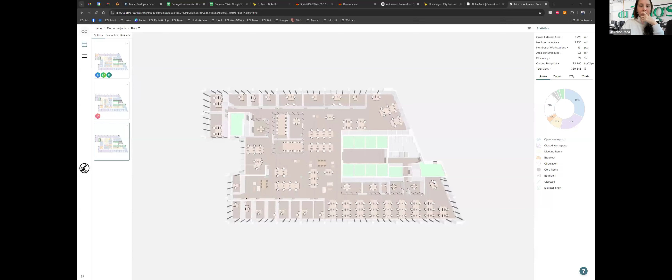It's usually a quite fun way for us to display things. Normally it takes a bit of time to go into rendering, but the idea is this: within the app you can just click generate the floor, make a few changes, and then go create renders. They are not always perfect because we are improving quite a lot of things.

But yes, it's something we are testing, just to get to a certain level where you can create a vision with a customer, so the client can see something. It doesn't have to be perfect because you say in advance this is something we generated now. You will probably not have this exact view out there, but it gives this kind of idea of the design. This usually takes about 20 seconds, and it is anyway a part of the design.

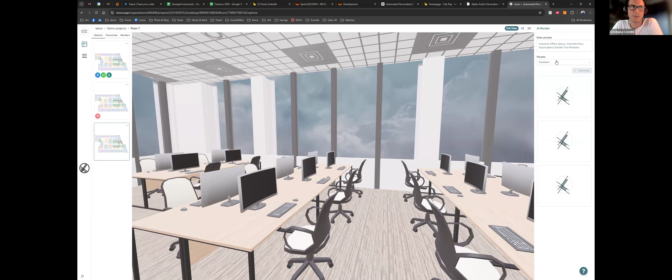Do you have any other question in the meantime? Not at the moment, probably afterwards when we try.

So of course it's not perfect, but in general it gives you - I always like a kind of New York style background - but it's mostly to give a vision of the space. It doesn't have to be perfect. If you're in the center of Munich, it's not exactly the same, but it is a bit different type of visualization of the space. It's more to give an idea of the view, but not all of it is perfect. If you zoom in on the keyboard, it's not maybe the perfect keyboard, but it's mostly like a consideration.

You can download this file, you can save the file, so you can create this kind of views that are mostly done in a matter of seconds, and you can create this kind of idea of visualization of the space. But then, of course, the design can change.

So I hope this helps. But of course, this function is mostly under construction. We're improving it quite a lot, but we had to build our own algorithm, so it took quite some time to get here. It's more like a pet project of mine that I enjoy doing because it helps with the generation of spaces.

Looks good. Okay, please, any question? No. Okay. You presented very well.